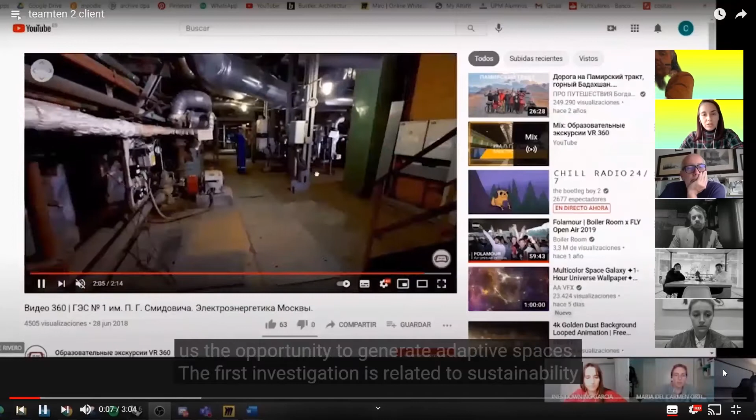Yes, there's no audio. I don't know if it's only my computer or everyone's. I think you haven't shared the sound.

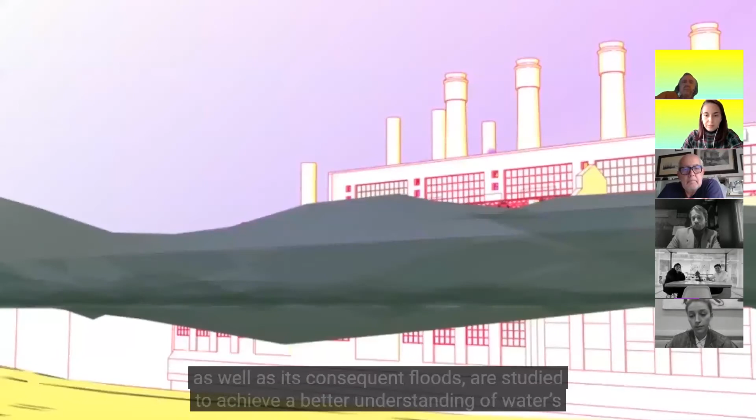We start with 3 investigations that have an unpredictable variable in common, allowing us the opportunity to generate adaptive spaces. The first investigation is related to sustainability and changes in the hydrography of the Moskva River. The swelling and descent of the river, as well as its consequent floods, are studied to achieve a better understanding of water's variability and how it impacts the project. On the other hand, we analyze the fluctuation of Bitcoin and the required energy needed for its mining, as a result of it being part of contemporary stock markets. Finally, the third investigation is in charge of understanding image hybridizations as a tool for creating adaptive spaces within the building. This way, we generate a dialogue between the 3 investigations, which converge in the search for new educational environments.

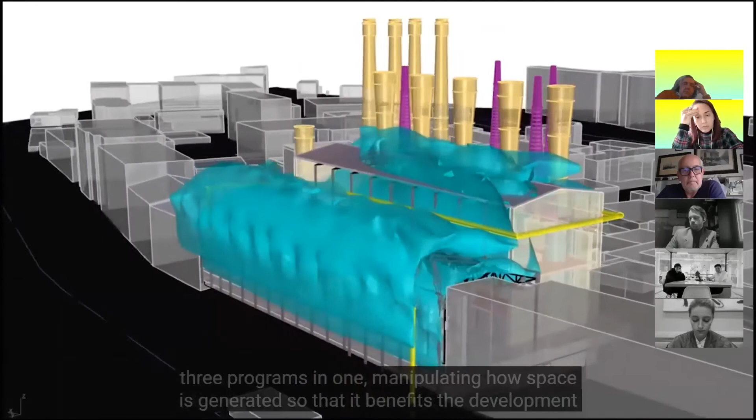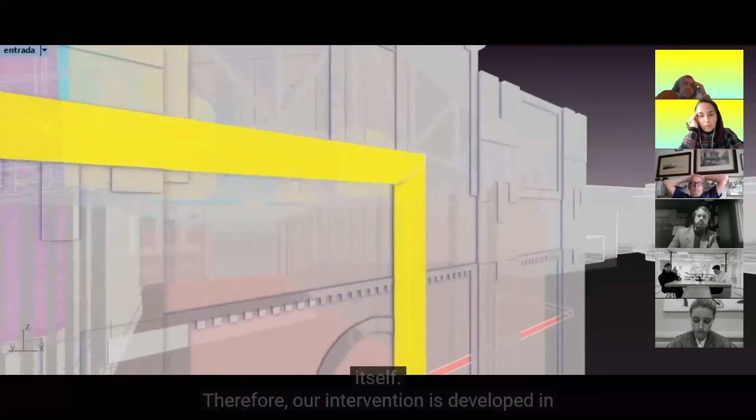The unpredictableness part of our project is originated in the children. The purpose is to combine 3 programs in one, manipulating how space is generated so that it benefits the development of children through multiple intelligences and their personal development. These programs are public baths, kindergarten, and Bitcoin stock market. The project spaces themselves are put at the service of those who are going to be the users. The different studies we've developed contribute to the generation of dynamic spaces, which explains the benefits that each model experiences thanks to fluctuations in water, in Bitcoin, as well as in the topography itself. Therefore, our intervention is developed in 3 parts. The first is the generation of a new facade that determines the sauna and public bath environments.

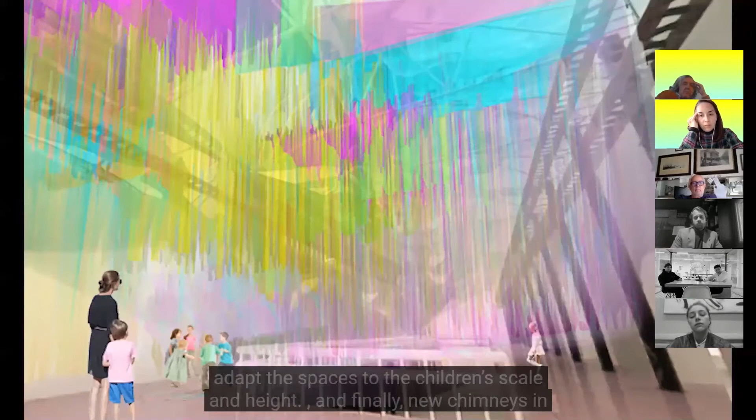Further on, interior divisions are created by hanging strings that adapt the spaces to the children's scale and height. And finally, new chimneys in charge of mining bitcoins follow the industrial site projected by the GES-1.

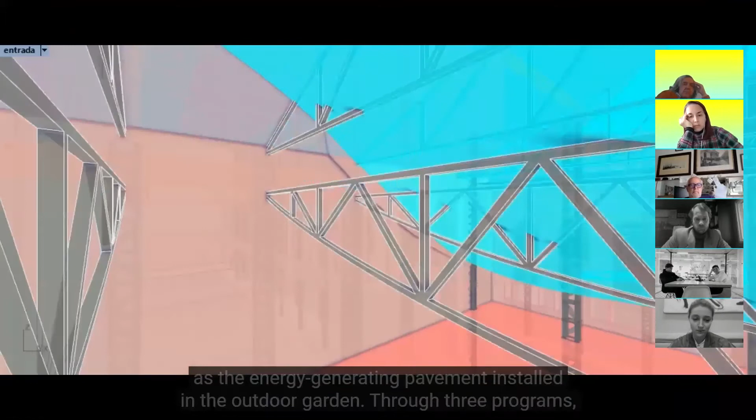The energy supply required for the operation of the project is possible thanks to the energy generated by the movement of water through the existing and newly created pipes, as well as the energy generating pavement installed in the outdoor garden. Through 3 programs, 3 levels of communication are produced.

Physical connections between the 3 units generate continuity in the movement and the possibility of an educational process, communication with Moscow through the development of an outdoor garden that connects the GES-1 with Moscow, and the last connection between Moscow, the GES-1, and the whole world.

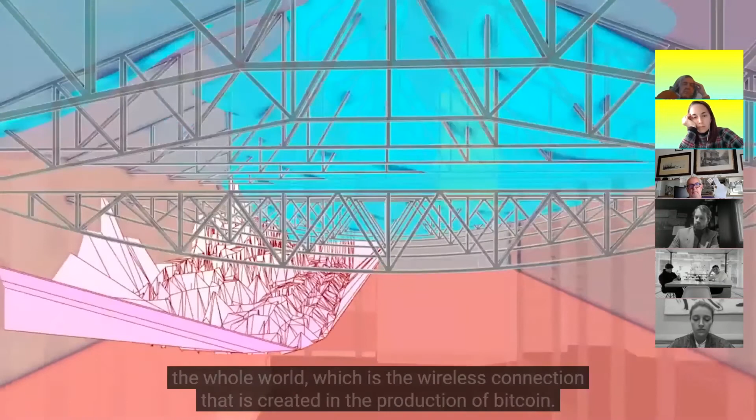Which is the wireless connection created in the production of Bitcoin. We want to educate the children of the future in sustainability from a post-carbon world point of view, with attractive environments for their development, rest, and education, while being playful and changeable, based on fluctuations in water, Bitcoin, and hybridization. The aim is to design domesticities in public areas that revolve around living spaces from a ludic point of view, as well as raising awareness of renewable energies to which we have access.

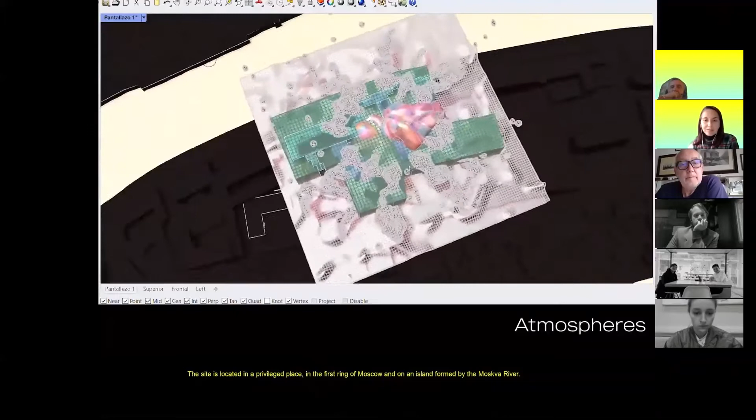The site is located in a privileged place, in the first ring of Moscow, on an island formed by the Moskva River. The bridge is the main pedestrian and road traffic connection with the center at the south of the city.

After the diagnostic study of the electric power plant area, a series of physical atmospheres are elaborated and introduced into the model. From the intersection of these layers, a first division of the site is established according to the interest of each member, which is later negotiated to specify common actions in certain spaces.

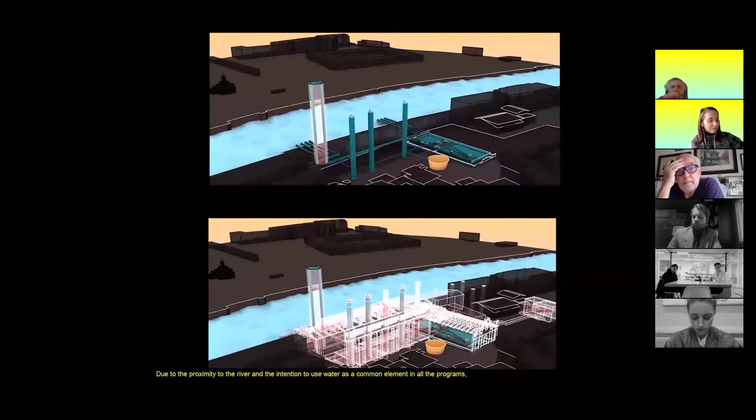Due to the proximity to the river and the intention to use water as a common element in all the programs, the chain structure of the system patented by John Todd is proposed in a coordinated way as rules for the use of water in the project of each member. The installation of the original water supply has been studied and taken into account.

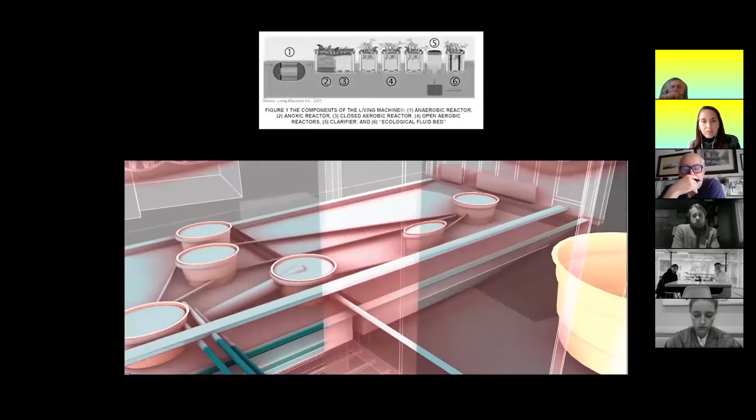The system is made up of 6 phases. Phase 1: a septic tank included in the tower of the waste plant. Phase 2: tanks with microorganisms to eliminate waste. Phase 3: reduce dissolved wastewater pollution. Phase 4: the surfaces of the reactors are covered with vegetation, providing habitats for beneficial insects and microorganisms.

These 3 phases are included in the crops and in the residence of elderly and students. Phase 5: sedimentation tank to clarify water. The last phase is located in the chimney of the supercomputer center.

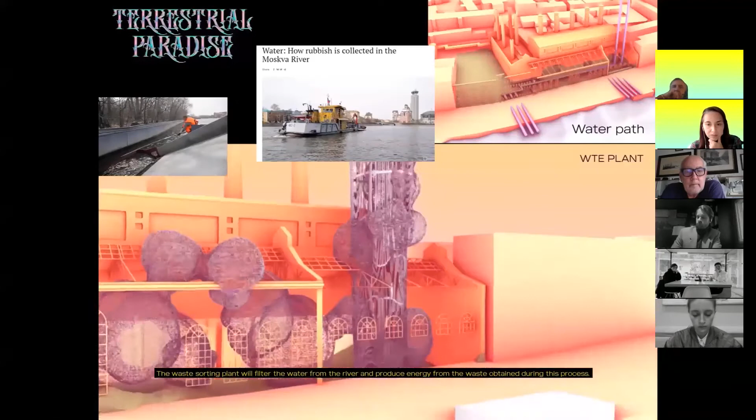The waste sorting plant will filter the water from the river and produce energy from the waste obtained during this process. Understanding the project as a purification heterotopia, after this sanitization phase, the water and its paths will spatially constitute and connect the other 2 uses: thermal baths and dwellings designed for urban singles.

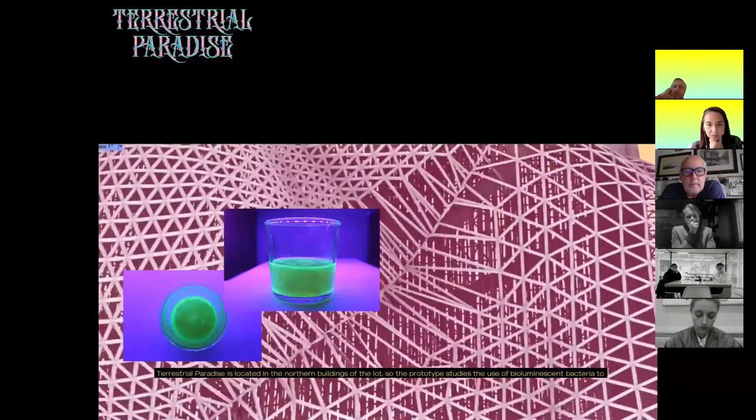Terrestrial paradise is located in the northern buildings of the lot. So the prototype studies the use of bioluminescent bacteria to monitor the river water pollution and its application in lighting

devices. The building is understood with a common element that will be the crops that will articulate the program. Consumption and support vegetation is introduced for the construction of an artificial microclimate supported by technology to counteract the adverse effects of the city's climate.

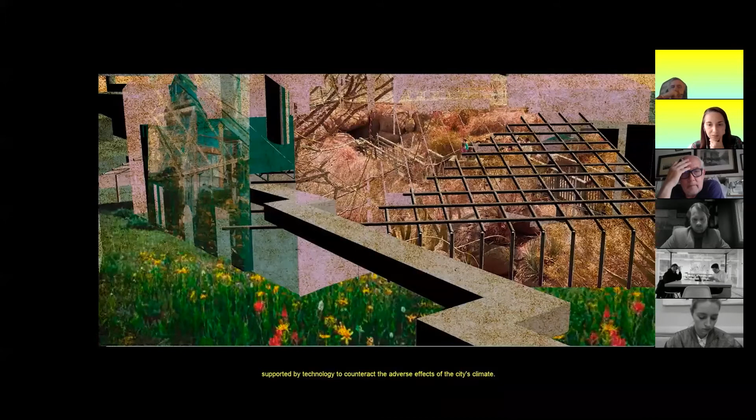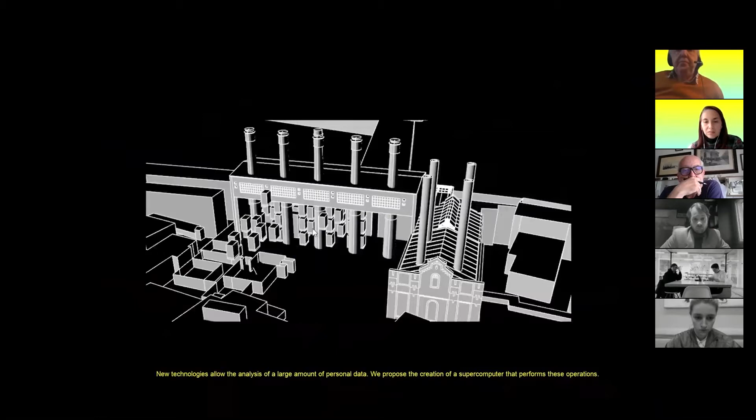The open data movement consists of the release of public data and is presented as the maximum expression of transparency. New technologies allow the analysis of large amounts of personal data. We propose the creation of a supercomputer that performs these operations.

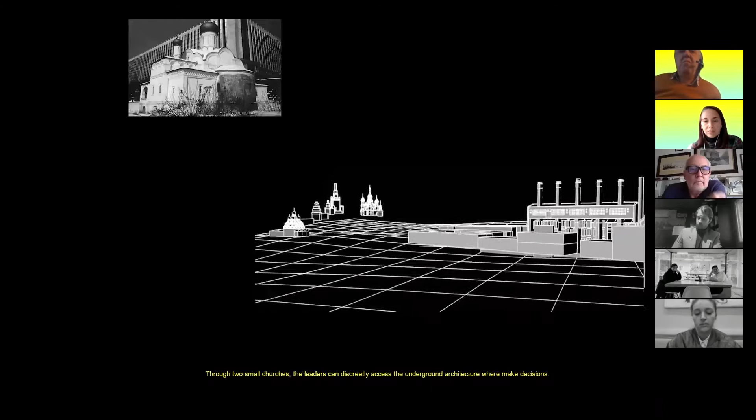However, the massive knowledge of personal data is the newest population control mechanism. After the demolition of Rossiya Hotel, tunnels were found to access secret underground spaces reserved for the Dome of Power. Through two small churches, the leaders can discreetly access the underground architecture where decisions are made.

If you can zoom the middle one, the bottom, yeah. This one. Yes.

We want to talk about the integration plan because in the video it's not clear, we think. So divide the plot considering the atmospheres of light, smell, and water.

And we have reserved an area for common spaces, and we use part of this space to allow pedestrian access, creating a transversal communication between the two streets that border the plot. We have maintained the existing access for the vehicular traffic.

Marcos, if you can zoom. Yes.

The waste energy plant and the rest of my program that is marked in blue is located in the area with less solar radiation, closest to the river.

So that's why my prototype studies the use of bioluminescent bacteria to monitor river water pollution and its application in lighting devices for the building envelope.

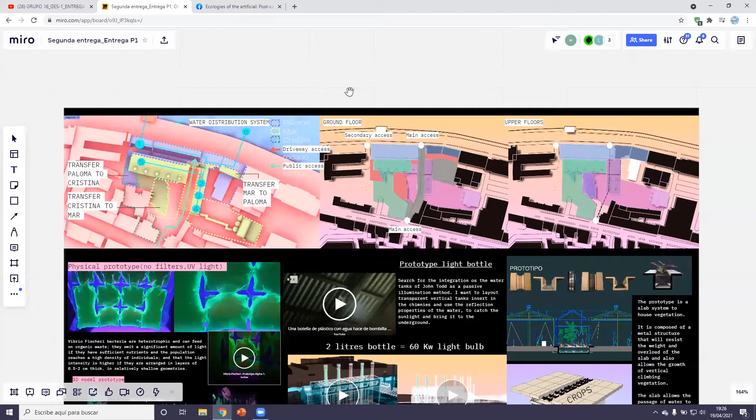Okay, in the middle one, you can see the prototype. The data center is developed in two sides architecture: a visible one related to the open data, and another hidden one, which takes place underground.

So my prototype sought the integration of the water tank of John Todd as a passive illumination method. I want to lay out transparent vertical tanks insert in the chimneys and use the reflection properties of the water to catch the sunlight and bring it underground.

And Mark? Mar, are you gonna talk a little bit about your proposal, the part of your proposal? Or yes, can you hear me now? Yes. Okay.

So to conclude, the data center greenhouse with crops is located in the sunniest area, marked in pink. The greenhouse will be equipped with technology to counteract the climate.

So my prototype is a slab system to house plants, which will be the common element for the whole program. It is composed of a metal structure that will resist the weight and overload of the slab and also allows the growth of vertical climbing plants. So that's all. Thank you very much.

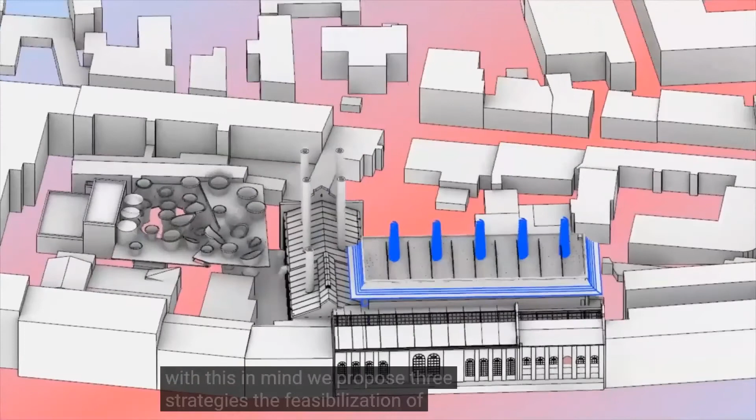When thinking about a post-carbon future, we tend to skip a step. As Jameson said, it's easier to imagine an end of the world than an end to capitalism. The internet has become synonymous with the 21st century, but the imagination has started a deceleration process, and most production is just a remake or refurbishment of past significance and ideologies. Regarding climatic collapse, we've known about it for more than 10 years now, but it seems impossible to mobilize and take steps to do something about it. With this in mind, we propose 3 strategies: the feasibilization of social stallment and the accumulation of culture, a proposal to solve it through social cohesion and solidarity, and the ideological shift in how we think about the natural and the anthropogenic.

We place our eyes on Gen Z as the actors that can solve the current cultural stallment. While millennials are poisoned with irony, platforms like TikTok show us how Gen Z organize and face politics collectively. They have also understood the decay of imagination, craving haunted aesthetics of ruined futures that could have been. Hauntology is a diagnosis and a call to bring Gen Z to our building.

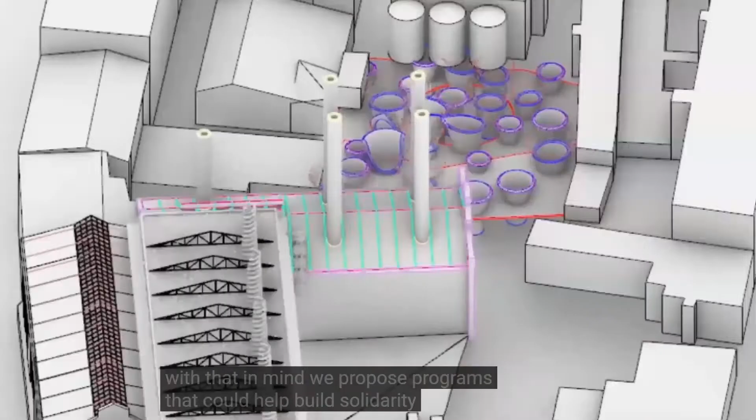With that in mind, we propose programs that could help build solidarity. In the southeast of the plot, we install a semi-open area for concerts, workshops, and markets. This space also serves as a park and includes deep water wells that grant us the water used for the other programs. One of the old factory buildings is turned into a creative space for the development and treatment of virtual art - NFTs, non-fungible tokens that could be exchanged for cryptocurrency.

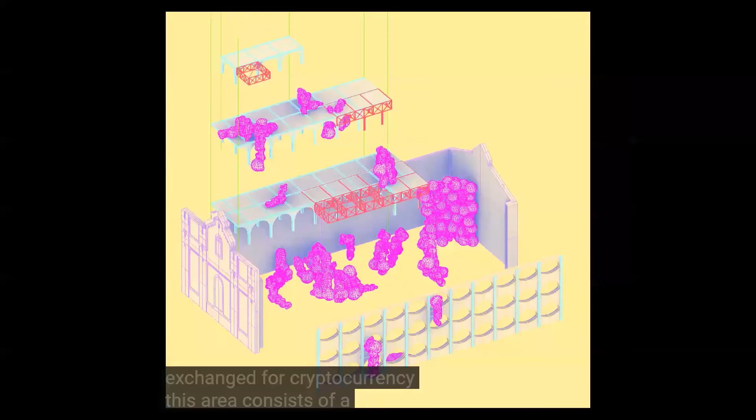This area consists of a series of arches and trusses with rivets, but also a prototype of partition, door, or furniture made out of hanging polystyrene-filled mattresses. This open area and prototype also allows users to experience other realities and virtual art through VR, while the prototype hides and cushions them.

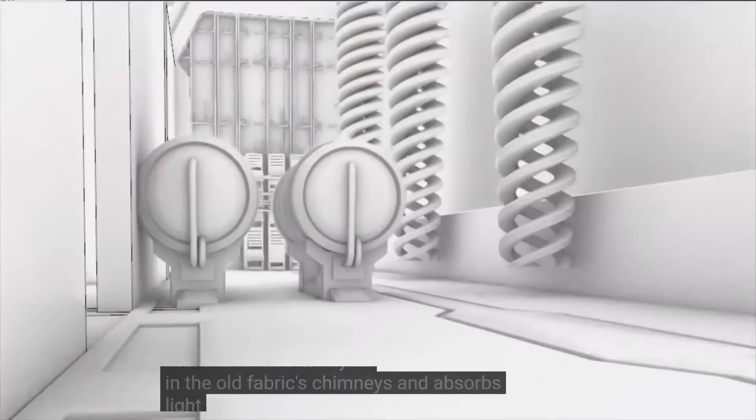The energy required to make this function comes from an algae prototype that starts its life cycle in the old fabric's chimneys and absorbs light to clean the air, clean the water, and reproduce, with organic carbon as its source of energy. This algae travels through the building and in the end gets composted and turned into biofuel.

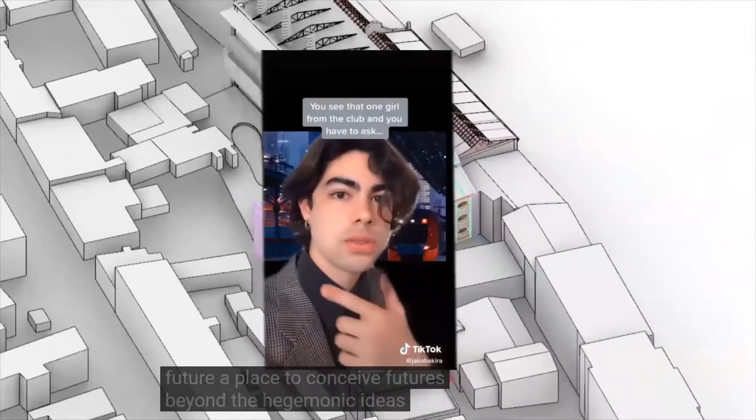The water ends up in small beaches for the users throughout the building. With this, we close the energetic cycle of the building while also turning it into a living being in dialogue with its surroundings. This building is the foundation for the future, a place to conceive futures beyond the hegemonic ideas of home or family, and whose users in turn will spread a different set of values and a different way to organize.

Alejandro, yeah, do you want— yes, you have 2 more minutes in order to explain something, maybe more about your project.

I think the project is still in development, and we have a lot of ideas that we want to put into the project that are not yet realized. But I think the video kind of explains the most general ideas that we want to end up having in the building.

Perfect. Okay, I think Guillermo, Navi, you can go ahead if you want.

Thank you for the video, I have a few comments. The first is about the start of the narration, about how this place will transform in the future. And you know the funny thing about GES1 is that it survived all the visions of the future.

It was built before the revolution, and it was working as a power station before the revolution. Then there was the revolution and the new visionary idea of the avant-garde guys about how we are going to transform our country into the great Soviet Union, etc. But it still was the same thing. I think the funniest part is that it really survived everything that changed around it.

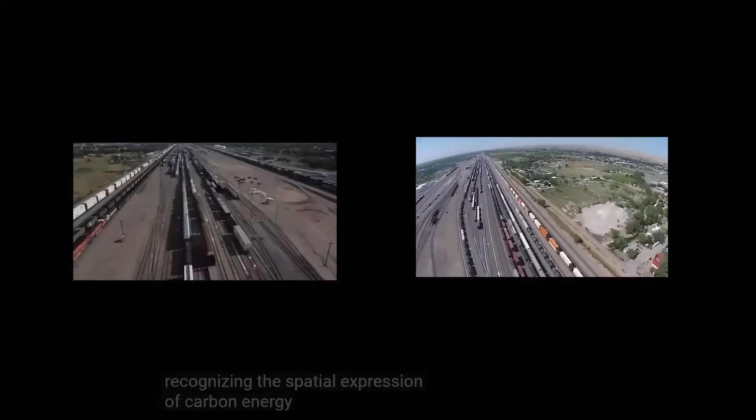A way of overcoming this cultural and architectural legacy is by recognizing the spatial expression of carbon energy, in order to establish a process of architectural degrowth. We propose a series of interventions that induce and accelerate the decay state of the station, understanding ruins as a catalyst space for the non-human living.

As a first analysis, a material catalog is developed, locating and analyzing each of the station's construction materials, as well as extrinsic and non-human strategies of degradation.

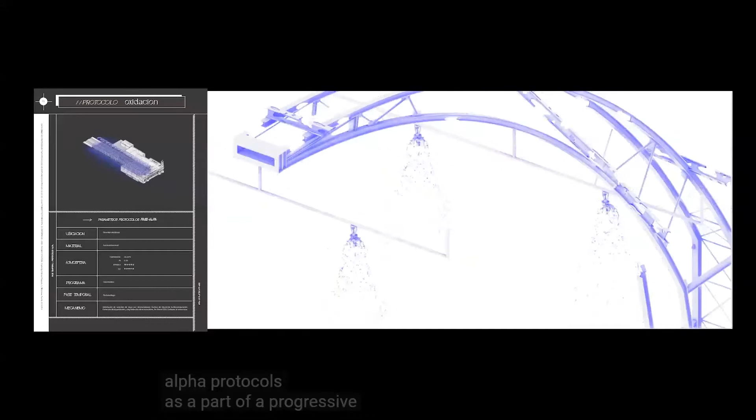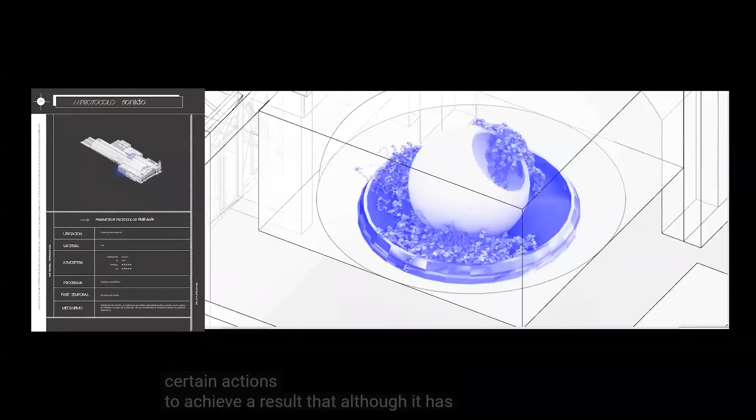We propose an open-ended collection of alpha protocols as part of a progressive and programmed degradation of Kievsky Station. Understanding protocols as mechanisms without apparent physicality that have the ability to transform space without defining the final result, but only the necessary steps to reach it, enabling, ordering, and prescribing certain actions to achieve a result that, although planned, leaves room for the unforeseen, the contingent, and its conscious manipulation or not during the process.

A sequence of events, of steps to follow, open to replication, modification, or subversion, which makes any authorship lose meaning if it's not formulated as part of a process in transformation. Some of the protocols described are oxidation through anaerobic bacteria, demolition of wooden structure by termites, or the rupture of pavements by roots.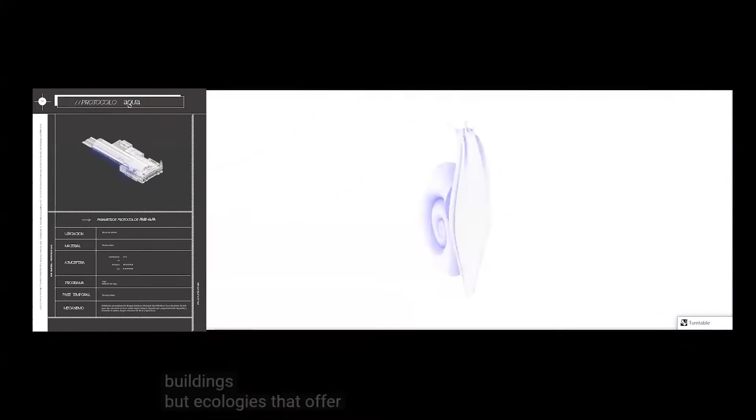We do not look at ruins as spaces of aesthetic, functional, and moral decay. Ruins are not failed buildings, but ecologies that offer reproductive and creative opportunities as a space of in-betweenness. As such, its transgressive space is not obliged to reproduce the normative system of the meticulously planned-out city. Through the incorporation of animal and plant species, the anticipatory ruination, rather than forcing a process of de-anthropization, unchains a picture of degrowth in the consumption of resources.

For the development of these protocols, it's necessary to generate a series of atmospheres. As a prototype, we're developing a possible simulator or generator of the atmospheres of the protocols. Based on the concept of Hylozoic architecture, we propose a technology that responds to atmospheric changes in the built environment and translates it into sound or light. This prototype can be used to generate different soundscapes that help redistribute the human and non-human fluxes inside the station.

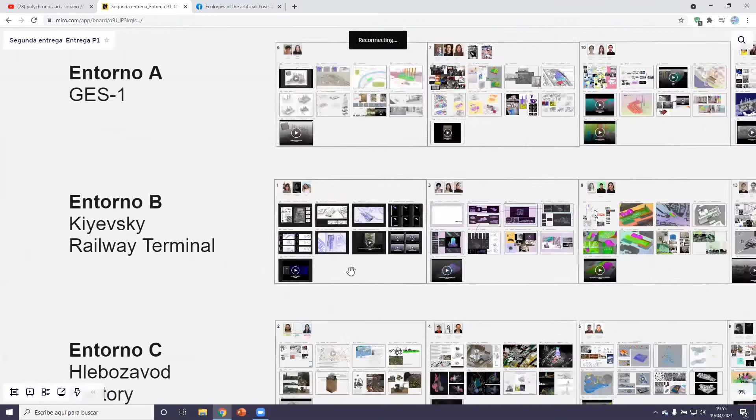Okay, and if Marcos, you can put the Miro up for a second, please. We wanted to just kind of quickly go over one of the protocols as an example. Where do I go, Marta? To the model, to 04. Okay, yeah, and which one do you want to show? The first one on the top left, for example.

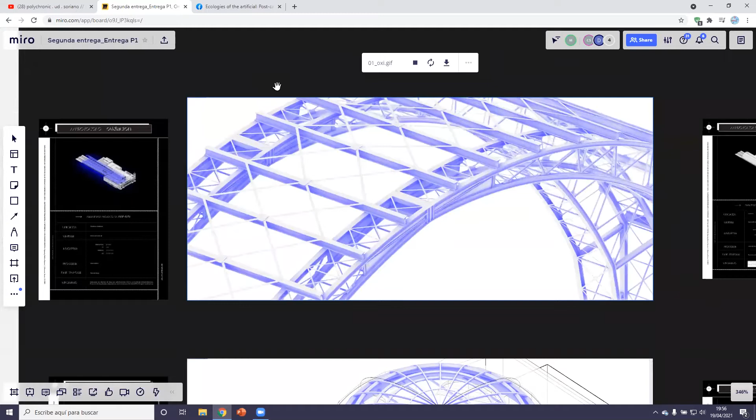So we just wanted to quickly explain one of them, so it would be a little bit more explanatory in depth. This protocol consists of oxidation of the trusses of the central space of the station. The oxidation is at first by the implementation of these water systems, which create a very humid atmosphere, and then the implementation of anaerobic bacteria, which also needs an atmosphere with very, very little oxygen, not entirely without oxygen. The implementation of these bacteria degrades or oxidizes the steel of the main structure. It's one of the longest protocols in time.

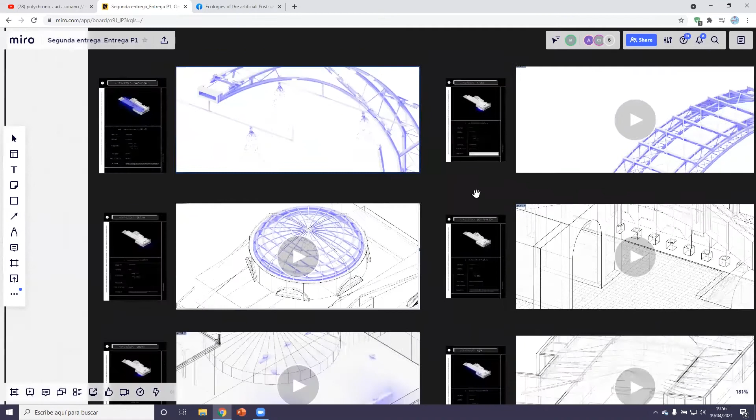There's variations. And then we also wanted to point out that we're working on this, because we understand that right now, at this point, the protocols are kind of detached. So we're working on this master protocol, which explains how all of the protocols intersect, or how they overlap, or how they're programmed in time, so it can be a little bit more explanatory at a bigger scale.

And I think that's it, right? Yeah.

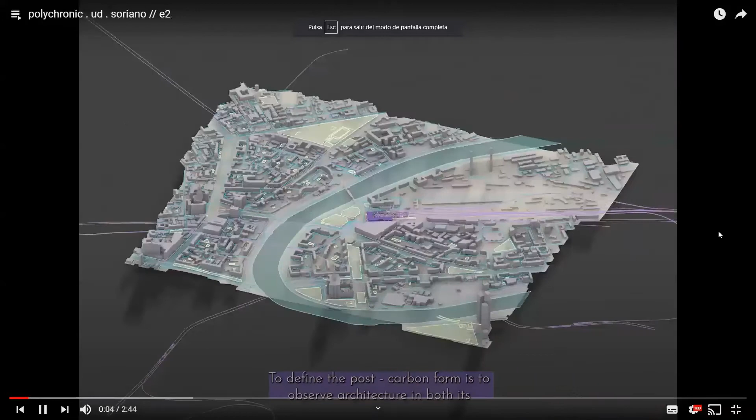To define the post-carbon form is to observe architecture in both its tangible and vague, abstract structures. The polychronic project uses the visible, sensible, and latent by layering them into a gradient of different variables such as the existing physical barriers, temperature, humidity, social behaviors, and spatial logics.

Temporality is studied as part of a broader understanding of movements in space, wherein the polychronic character of inhabiting a place like a railway station in Moscow makes the combination of activities and time management all the more complex. The aim is to plot a number of spatial logics amongst a variety of programs with different atmospheric sensibilities, based on the peculiarities of each user, and paste them onto the actual axis of Kievsky Vokzal.

The distribution of different programs merged by a range of atmospheres and activities provides a medium for three specific architecture scripts that are to conjugate into a single spatial, heterogeneous experience.

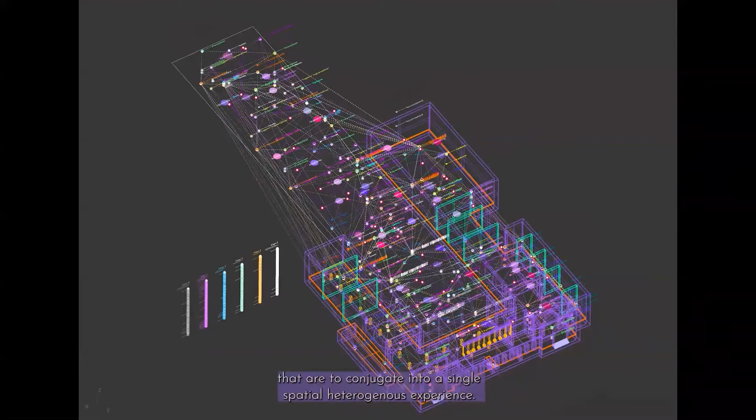A series of membranes is softly settled onto the nave, enriched with polymers that absorb carbon dioxide, taking advantage of the low environmental temperatures in Moscow and the water heated by the auxiliary batteries located on the trains. Meanwhile, a whole gradient of humidities is developed in order to create a variety of atmospheres capable of supporting various activities throughout time, which are themselves changing depending on the train flow and the water temperature.

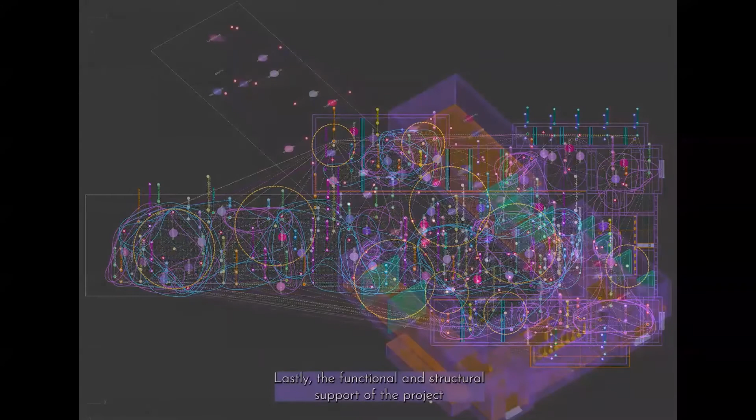The piezoelectrics embedded in the ground act as a generator of energy, while creating portions of topography that lie on the points established as the main sources of body heat. This energy is later used to produce a variety of temperature situations in the space established by both membranes and topographies. Lastly, the functional and structural support of the project is embodied by vertical elements and different typologies of tubes.

These tubes represent the physical extent of the already created sensible universes that maintain positive-negative correlation, meant to provide the spaces with a range of products in a variety of conditions. The project's interests are then blended into an integration plan, combined altogether with the previous definitions of timetables and activities.

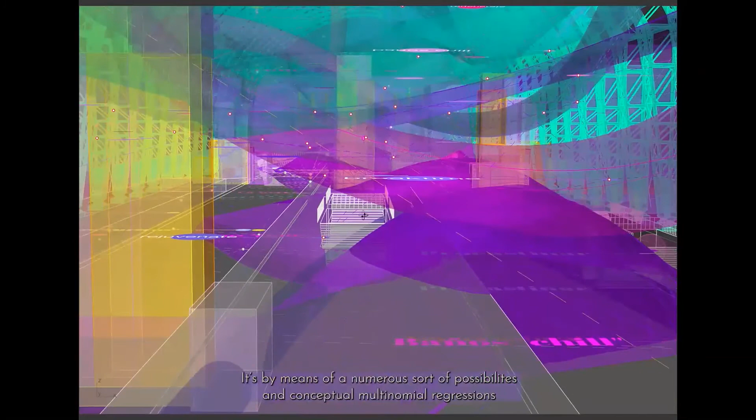The resulting model aims to establish touching points among the structures, both physically and energy-wise, thus creating a web of point clouds subjected to users' personal choices. It's by means of numerous possibilities and conceptual multinomial regressions that the post-carbon form is achieved.

The general idea is to explore the correlation between referred conditions such as temperature, humidity, activities, and movements in space, rather than subverting the first ones exclusively to users' commodities and caprices, which is something we've observed in the carbon era. So we are searching for a feedback and co-influential relation by putting the intangible spatial undertones, the temperature and humidity, tracing by themselves the way of living of a place, while the number of forms these conditions may take depends on the energy quantity and quality provided by users' movements, the body heat we mentioned, and these by themselves depend on the train timetables.

My turn? Yes, thank you for the video. My general comment is that it is clear you have done a very comprehensive job trying to investigate how all these things could work.

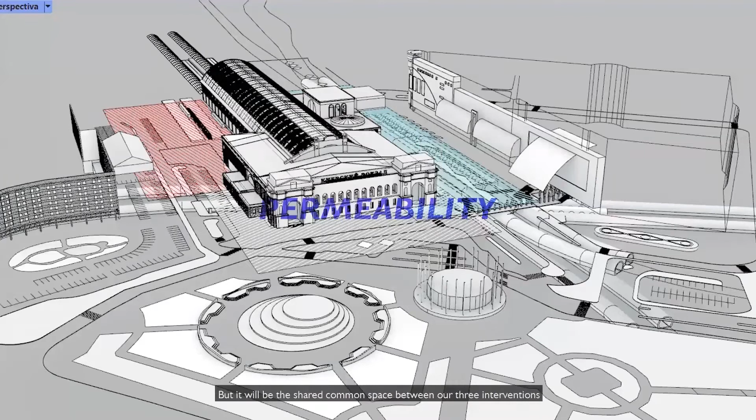Our common strategy is to work around the edges of the station in order to increase its permeability in all directions. We will not intervene architecturally at the Shukhov platform hall, but it will be the shared common space between our three interventions as a public space. Yet we'll be respectful of the rich cultural heritage of the entire building. Our interventions have as objective a mobility based on people, but which transcends other dimensions - ecological, informative, and cultural - aspiring for the station to evolve from a mere intersection to also a place to stay and enjoy.

Considering the places with the greatest influx in the surroundings of the Kievsky Station, such as the large commercial areas and the markets, a varied collection system is proposed, which allows recycling at source from anywhere in the neighborhood.

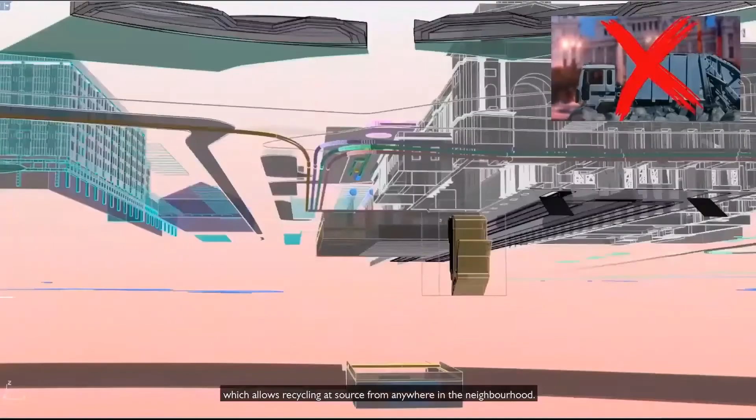On top of the neoclassical building, the recycling center rises up with a local-scale strategy. It receives waste by direct access to the tipping deposits from the collectors. A series of conveyors, belts, and robotic arms separate the various wastes that can be recovered from those that cannot.

A glass facade allows visitors to observe the recycling process, revealing the growing interest of Muscovites in achieving the goal of zero waste.

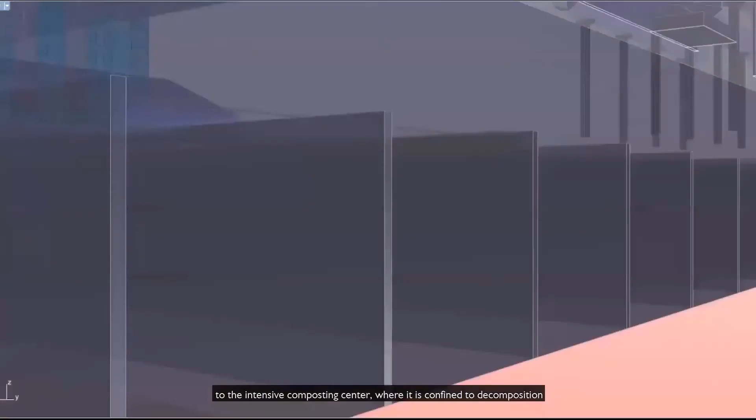The highly degradable organic matter is conducted on a conveyor belt to the intensive composting center, where it is confined to decomposition and maturation processes in a series of tunnels.

Only the rest fraction of those materials that cannot be reused or recovered are taken to a fully buried incinerator, where the energy is recovered and used in the intervention and the vicinity.

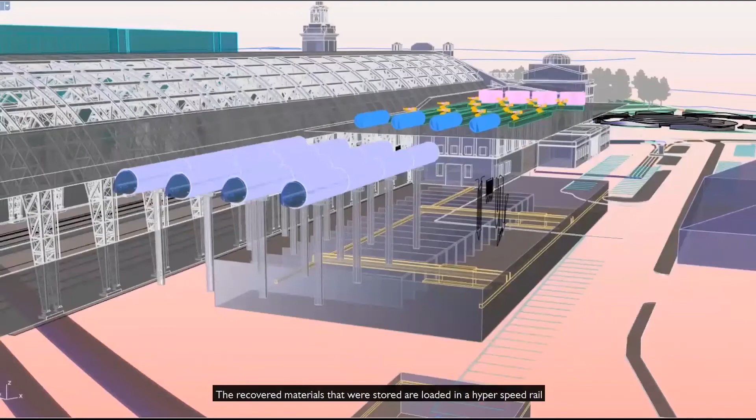The recovered materials that were stored are loaded in a hyper-speed rail to be delivered to recovery plants, industries, and farmers. Hyper-intensive vertical horticulture and agri-food laboratories complete the proposal.

The station becomes a hyper-connected node that during the night, at the end of the passenger use, sends the materials to the processing industries using the circular line of the metro.

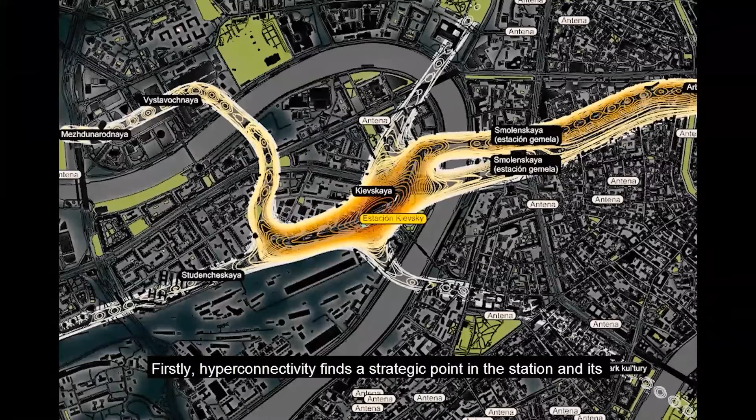Firstly, hyperconnectivity finds a strategic point in the station and its surroundings, since the Moscow Metro is the largest public city network that gathers people and offers free Wi-Fi, which also represents a virtual gathering of data and information.

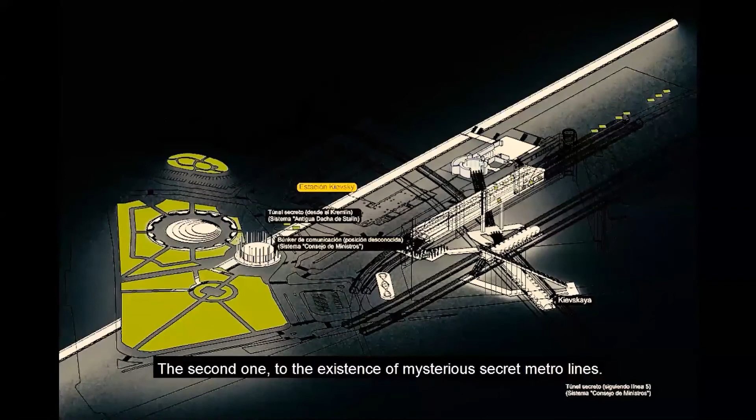Secondly, what is visible and what is invisible is based on three binomials. The first relates to the abstract character of data as opposed to people. The second to the existence of mysterious secret metro lines. And the third to a divided programmatic distribution, one part being superficial and the other remaining underground.

The project looks for both the informational permeability of the station on the surface, and the living possibilities offered underground, thanks to its direct connection with the adjoining public surroundings, where some spaces are public, others private, and some are still secret. In this way, the station becomes a digital hotspot, rethinking the limits of physical mobility versus virtual mobility.

It no longer is a mere interchange, but a data and information epicenter at multiple levels: the station itself, Moscow, Russia, and even the rest of the world.

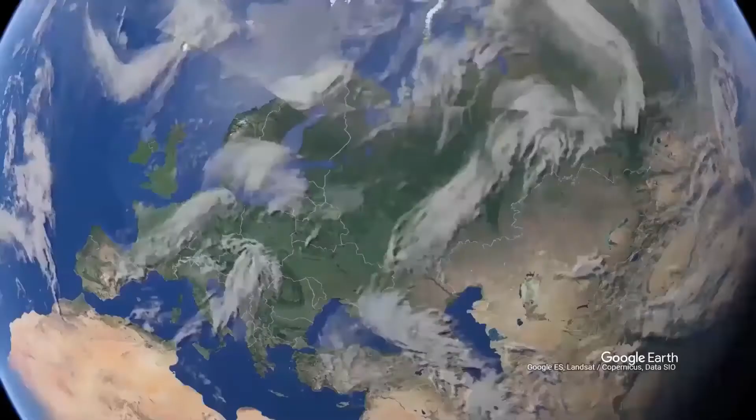Russia, and especially its capital, has always been an important center of classical art and culture. Some of the world's greatest pieces of literature, music, ballet, and operas came to life in Moscow with its architecture as background. Even after the revolution, Stalin used a neoclassical style as a tool to promote the socialist ideals in public buildings.

Compared to the grey residential areas, these luxury train and metro stations are part of the Russian cultural heritage. This kind of architecture contains the most important transportation hubs of the city.

These hubs are ideal places to connect the rich cultural heritage with the people that are already there, forming a new open and public cultural space.

The elongated space between the Kievsky station and the shopping mall will be used to place a theater school and create a public space with qualities of an ancient Greek agora and the Las Vegas Strip.

The theater will turn towards the station, using the rich facade composition as a stage.

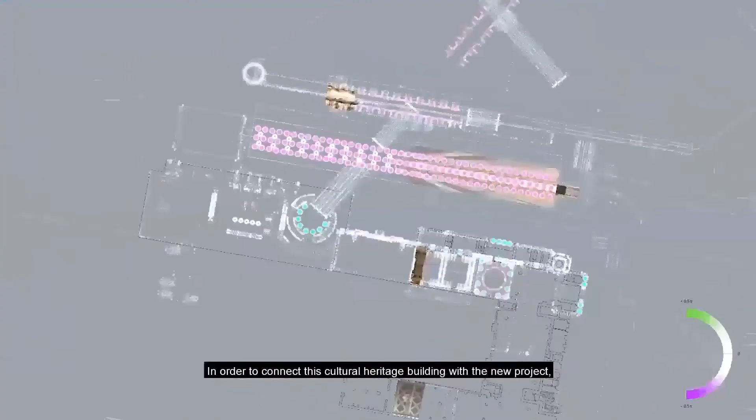In order to connect this cultural heritage building with the project, the north part of the station and the metro platforms underneath are analyzed through its details on every surface. The different densities of details will determine the optimum parts of the station for the project.

Another connection of the project with the rich pre-existence is done through materiality, exploring new ways where materiality can trick the eye of the users. With the Venetian technique of scagliola, we can imitate marble with a moldable material that can capture ephemeral forms affected, for example, by the forces of gravity.

These three programs will be coordinated affecting the borders of the Kievsky station, increasing its permeability and providing this new perspective on future mobility.

Maria, Borja, Miguel, do you want to add anything? No, we said everything at the beginning, so you can please continue giving us feedback.

I was touched by a sentence you used at the beginning, that you were doing this project as a team by contractual obligations, which was funny for me. But when you have a contract, you have to all agree on the terms, no? I had the feeling the three projects could be together or could be separated. I didn't see so much synergy between the three programs. Why are these three programs chosen to be there, and why are they chosen to be there together?

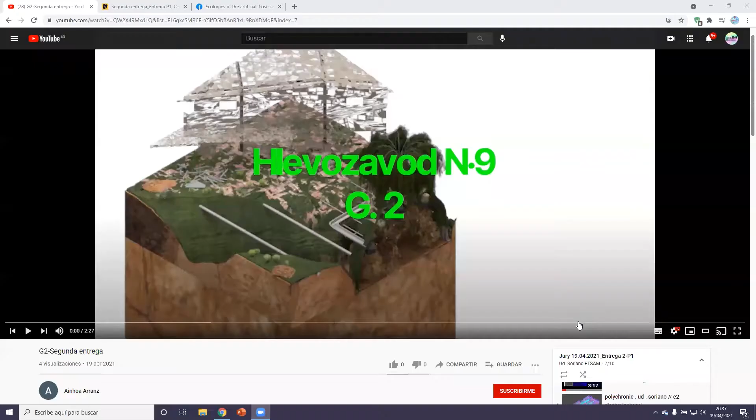The project proposes the integration of a public green space in Moscow's metropolitan area in the form of an ecological cemetery. In the context of a post-anthropocentric vision, a cemetery is projected where worship refers to the place and not to the individual. The project makes a direct reference to Celtic funeral passages, where the program can be enjoyed as a whole, and in which the accumulation of bodies works as a generator of space.

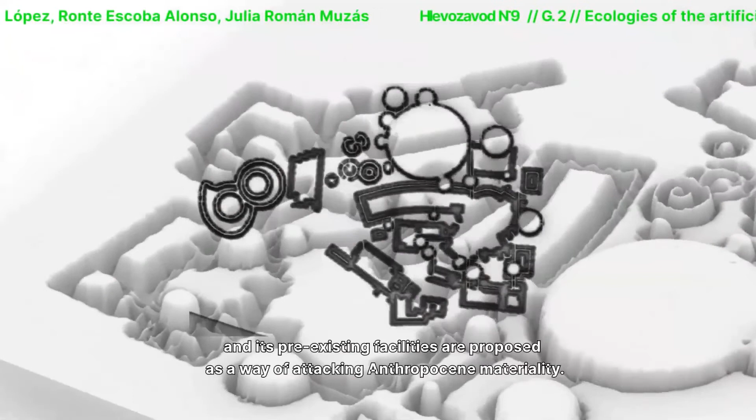For the design of this large space, overlapping systems throughout the plot and its pre-existing facilities are proposed as a way of attacking Anthropocene materiality. The main targets will be pavements and facades. Those elements will be part of the future construction. Further on, other systems will replace these targets and improve the local environment.

The project begins with the dismantling of the old bread factory facade. The building's skeleton is left as a monument to its own death, but also to project the new space. Simultaneously, the works begin to coexist with the burials. The debris generated is used to create a topography of mounds that house the tombs.

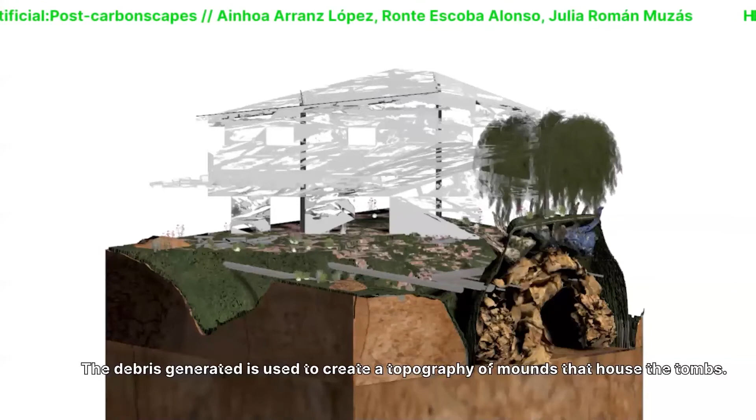A system of ditches and pipelines will be installed, solving the problem of contaminated water, not only cleaning it, but also creating a self-maintaining green space. This local green space will thus contribute to improving the problem of air pollution in the city.

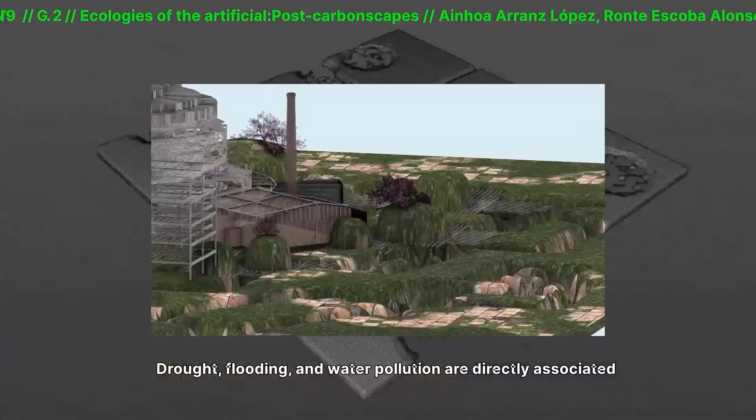As today's cities are paved, soils are not permeable and the phenomenon of the heat island is generated. In the post-carbon city, soils must regain their role in the hydrological cycle, which has been interrupted with serious consequences: drought, flooding, and water pollution are directly associated with the properties of geological soil. Recovering its properties involves regenerating an erodible, evolutionary, and adaptive soil. This means adapting to one of the main effects of the Anthropocene era and reversing it.

We will create a topography with the debris of the building's facades, covering them with an erodible temporal pavement, which will subsequently give way to the regenerative, fertile soil. The tree roots will support the granulometry of the substrate, preventing landslides.

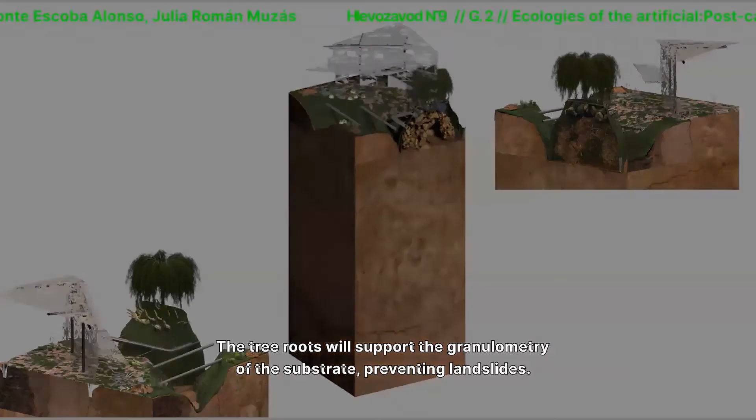You may have noticed that it is kind of difficult to understand the global scale and dimensions of the project, but to clarify it, the mounds measure from 4 to 10 meters tall, depending on the mound. And the passages are quite small in order to make intimate and personal ritual traces.

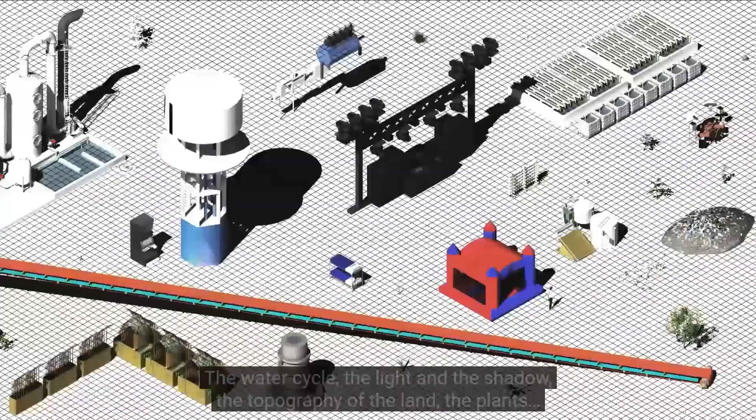The water cycle, the light and the shadow, the topography of the land, the plants. That is the building, just like the pipe circuit, the sensors, the social media. A new ecosystem is created. It is a technological biological community of interacting organisms and their virtual physical environment. These dichotomies are the genesis of the project.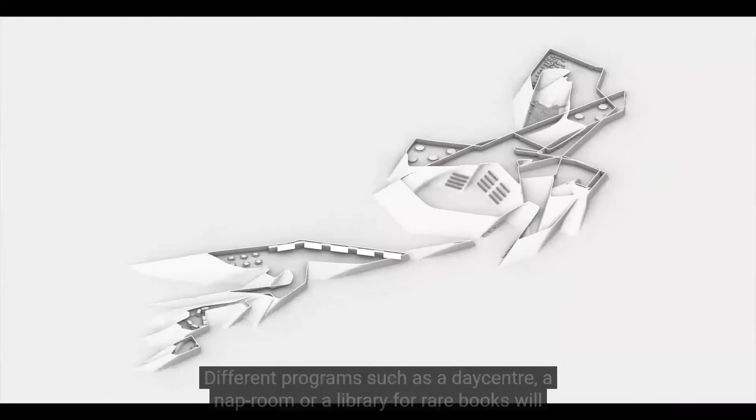We decided to enhance its shape to collect the water contained in the night's humidity, using a textile mesh as a fog harvester. The next operation is located where the shadow casting becomes a thermal issue during the cold months. In order to solve this, we build these volumes from the shadow parameters, minimizing the shade casting. Different programs will be placed according to volumetric data, achieving optimal sunlight on exterior surfaces and solar radiation-free interiors.

Fauna and flora. Nature has always been our source of food. Now, we are cooking the earth to death. We are more and we eat more. To deal with that problem, we domesticated food.

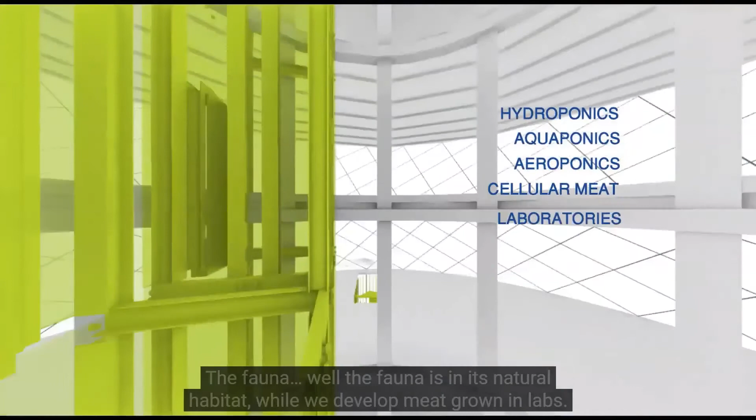The project enhances that last fact and creates a hyper-productive ecosystem, which is the fruit of a happy marriage between biology and technology. Flora relies on software, sensors, and complex systems. Fauna? Well, fauna is in its natural habitat, while we develop meat grown in labs. Technology is our next nature.

Soil and climate. Based on the analysis of the heat loss of the buildings and the analysis of the water flow on the buildings, the overlapping and intersection of these layers give rise to the space for intervention. An envelope is created that solves two things. The first is to create a microclimate in the interstices of the buildings, taking advantage of the heat loss between them.

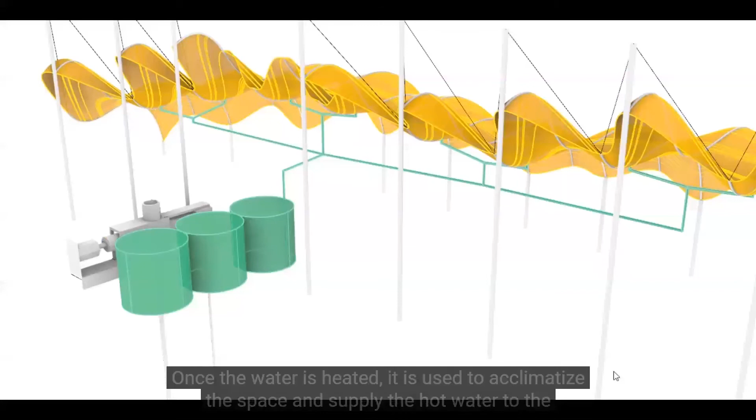The second is to collect rainwater through a circuit of pipes that takes it to a small geothermal power plant. Once the water is heated, it is used to acclimatize the space and supply hot water to the thermal baths. Existing buildings will serve as server buildings for the program.

Nature, as we have understood it so far, is not enough. Its resources are limited and cannot be adapted to us humans. Then, a superproductive nature is created. Biology and technology come together, creating a new ecosystem.

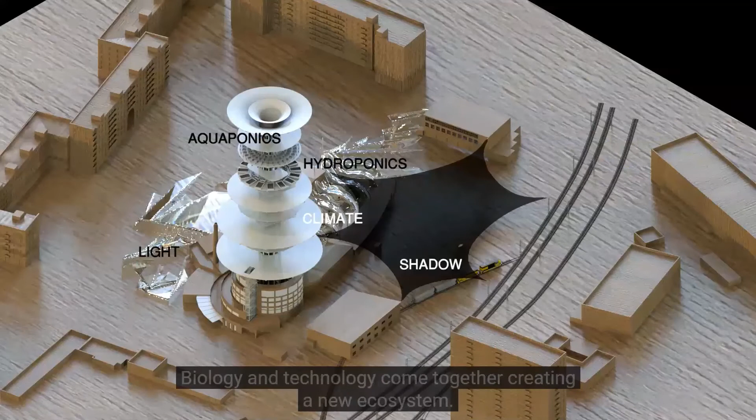In this new way, nature becomes more resilient, ensuring its adaptation to higher demands. The union between what has been understood as natural and artificial is considered necessary for the survival of the Earth. The project proposes a possible form to this juxtaposition.

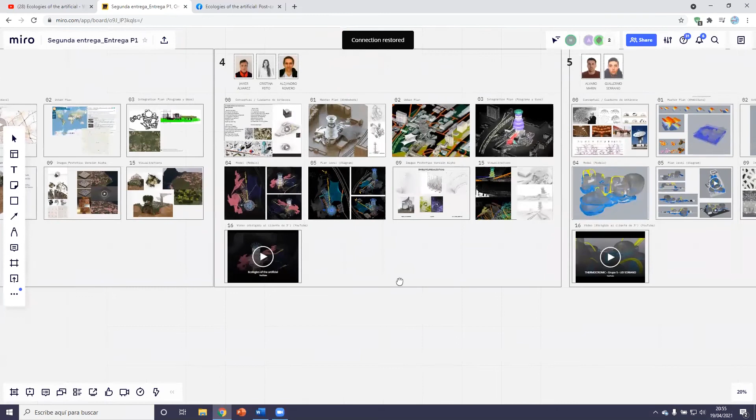Maybe in the video it isn't too clear, but we wanted to emphasize that the global idea of the project is to create an artificial nature, optimizing the climatic conditions through our models in order to achieve a multiplicity of programs exploiting its spatial and climatic characteristics.

The union of the models, such as the transformation of the existing topography for better controlling sunlight and shade casting, allows us to host programs that benefit from mainly sunny outdoor spaces during the cold winter and indoors without direct solar radiation. The envelopes manage to control specific areas for determined microclimates, such as the hot springs.

Through geothermal energy, it's possible to have bathing at 40 degrees Celsius in Moscow in December, at the same time that they collect the assets of existing nature to take advantage of their potential energy.

This could also have interesting consequences, such as the social media impact and growing popularity of the building. Together with the current 40,000 visitors per day, it's the perfect marketing for the building. And also the towers finally work as an element of production and distribution of the whole organism.

The project was born out of the need to provide an answer to the greatest human question: death. What is life? What is death? Where is that frontier, that limit? But above all, where and how does it take place? We spend our whole life thinking about what our end will be like, who will be present at that moment, and what will be the degree of suffering involved—dying with dignity, painless and freely.

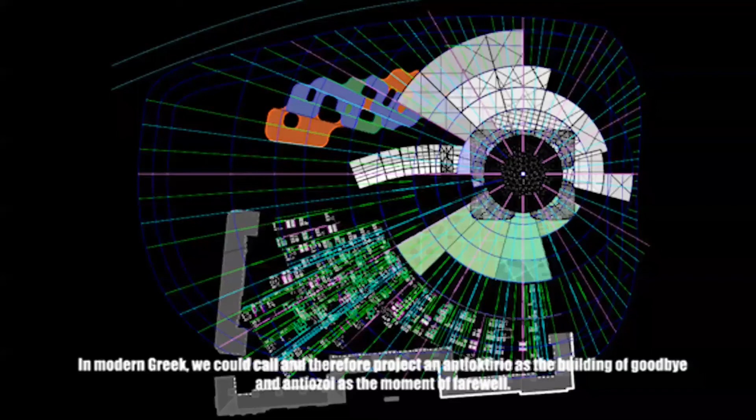The term euthanasia means, in ancient Greek, good death. Greek culture was a pioneer in naturalizing death and unbounding the material disappearance of the body. In modern Greek, we could call our project antioktirio, the building of goodbye, and antiozoi, the moment of farewell. The term post-carbon refers to what, according to us, happens after carbon, after life, in multiple layers: energy, matter, spirit, nothingness.

We propose a circular system that welcomes and provides an architectural solution to the phase before, after, and at every single moment of death, from the theatrical and technical narrative in equal parts. Plotted with a productive background, this circular system of body matters is composed, at first, of a film and theater school, preparatory of the body and spirit for the moment of death.

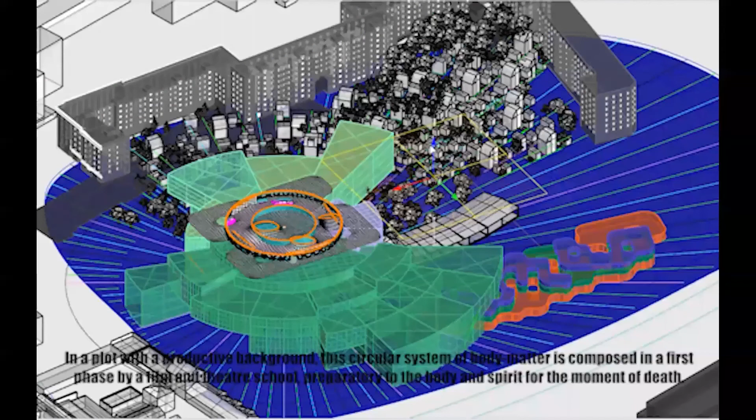The rooms of the school are sheltered by a lower level and forest that aid seclusion, leaving the upper parts of the room for film projection and the staying of students, who will have a residence close to the school. The subject to die can choose when and how he or she will die, whether there will be people watching, whether it will be a family farewell, or if it's a more individual, personal act.

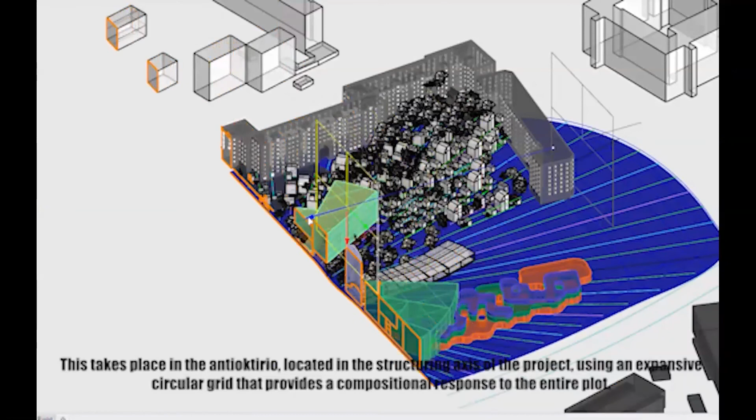This takes place in the antioktirio, located in the structuring axis of the project, using an expansive circular grid that provides a compositional response to the entire plot. One is able to choose how he wants his body to be treated, with solutions ranging from cremation, burial in nature, or—our favorite—donation of the body to science, within the corresponding legal and sanitary frameworks.

To this end, in the third phase of the circular post-carbon system, a research and co-working territory is planned, where, through the study of human tissues, the treatment, classification, and qualification of human matter after death is carried out.

Finally, there is a space dedicated to large-scale distribution, thanks to the connection with the world health system by land and air, where an organ bank and a transplant market are planned—supplied not only from the deceased users, but also from people who altruistically, or not so altruistically, want to donate tissues or organs.

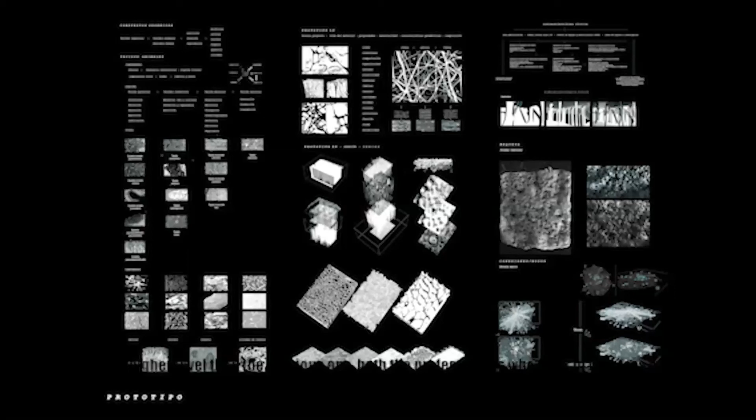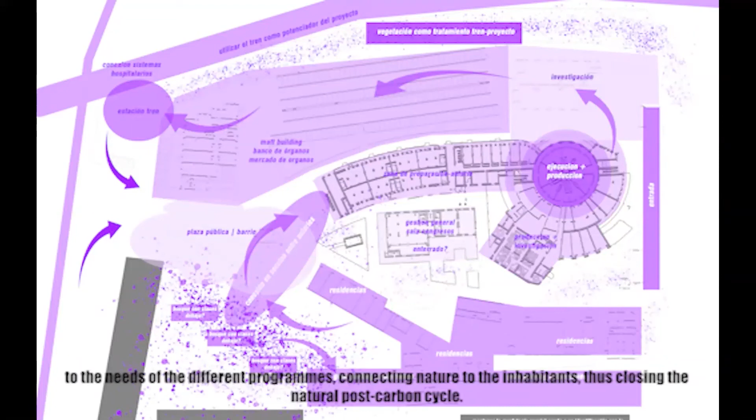As a project of peace and eternal rest, the plot is occupied by projecting prototypes that speak of all of these phases on a thermodynamic, organic, textile, and performative level, investigating the different layers of the project from the physical to the digital. The space of the plot is topped by accumulative standalone dwellings in vegetable terraces that respond, according to modulation, to the needs of the different programs, connecting nature to the inhabitants, thus closing this natural post-carbon cycle. Thank you very much.

All right. Go ahead, Alessandra. Yes, I'd like to say that there should be a very specific reason why a very important topic like death - well, I wouldn't say as a catalyst of architecture, but how it's represented or reflected in architecture - should be thought of exactly in this area. For me it's a little bit unclear at the moment, although I really fully support the topic in general, because I think it's an undeveloped topic yet, well, especially in the Russian context, it's somewhere far away. So it's an important way.

And it reminded me of the movie Island from 2005. Yeah, I don't know if you were inspired by this.

Well, at the moment, it looks a little bit like a scenario for another utopia. But if we are talking about putting this in a more local context, I think there is room for work to be done yet to really locate these solutions spatially on the territory you showed us in the beginning. Because at the moment, I don't really have a clear connection of why this thing is happening exactly in this space. I don't know what are the justifications for that spatially. Why would people be interested, and what would it actually give to the territory around? How would it boost the life of the city, or the future of the city? I think this part is a little bit missing for me, but I appreciate and applaud the important topic you actually raised with your project. So thanks.